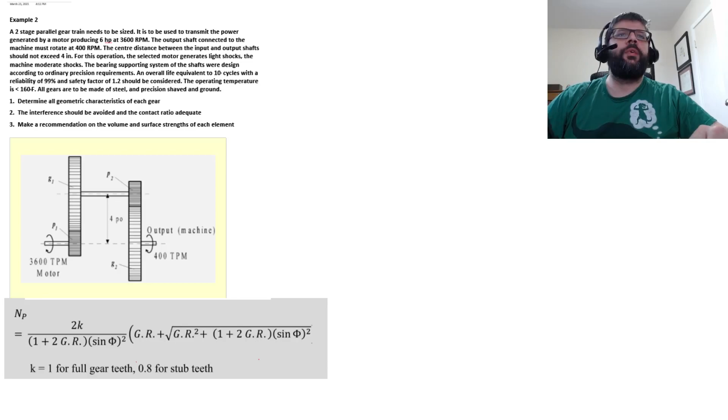Okay, so let's have a look at this problem here. It's the one we started earlier, where we'd solved based upon the combination of this rotational input, this rotational output, and the 4-inch offset, that we need the diameter of the pinions to be 2 inches, and we need the diameter of the gears to be 6 inches. And obviously that goes for both sides as well.

In addition, we want this thing to be transmitting 6 horsepower. The input is going to be equivalent to a light shock condition. The machine it's connected to is a moderate shock. We've got bearings of ordinary precision requirements.

Overall life expectancy of 10 to the 7 cycles, and a reliability of 99%. And then we want to have a safety factor of 1.2. So that'll be for both the surface fatigue and the bending fatigue, or the volume strength. Operating temperature less than 160 degrees Fahrenheit. So again, it's not hot enough that that's going to affect things. And we're making them out of steel, precision shaved and ground.

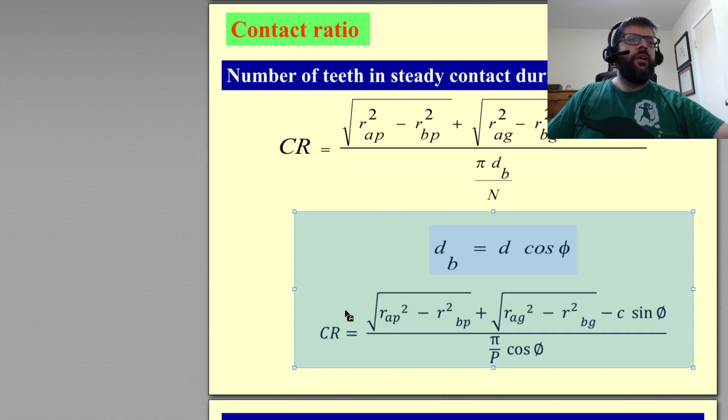What we want is, we need to pick a pitch, basically. So again, pitch is equal to the number of teeth divided by the diameter. So we need to have at least 15 teeth, which means that the pitch needs to be at least 15 divided by the diameter. So the diameter is 2, so 15 divided by 2, 7.5.

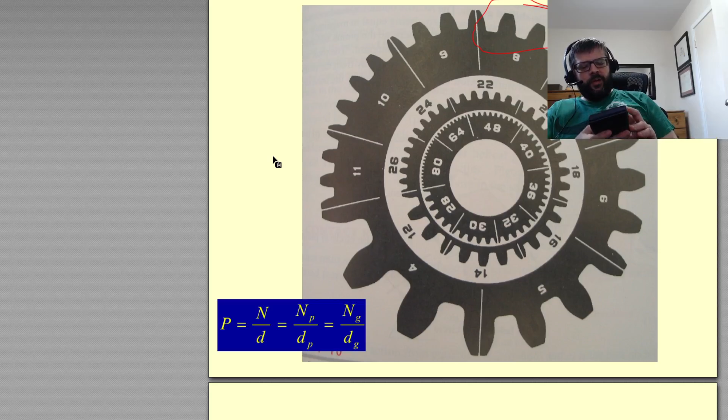So again, if we go back up to this chart right here, we see that 8 is reasonable, we can likely find 8. 8 or 10 would probably be suitable. We'll stick with the 8 value for now, so that our pitch, P, is equal to 8 per inch.

So if P is 8 per inch, the other aspect of the geometry of the gear that we need to find out is the width of the gear. So the face width of the gear typically varies from 9 over P to 14 over P. So we can pick something in the middle, or something on the high end if we want. What you actually decide will also depend upon what sort of gears you can get from your supplier. You probably don't want to be having these custom made. So if you can get something suitable in house, like off the shelf, then that'd be great.

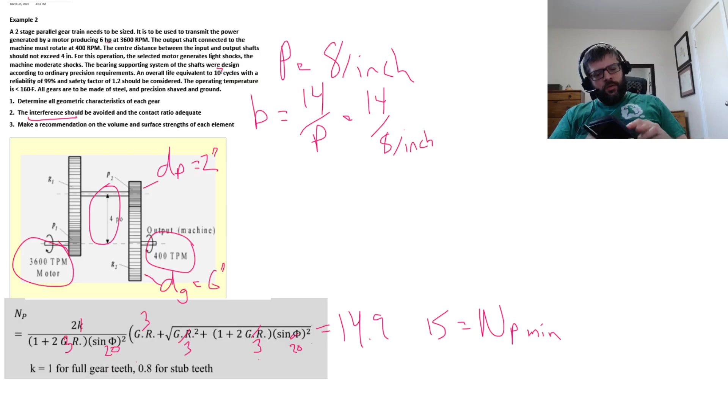But for the time being, let's assume we're going to go fairly wide, just to share the load a bit better. So let's go with a B of 14 over P. So 14 over 8 per inch. That'll give us 1.75 inches. All right, so our B is 1.75 inches.

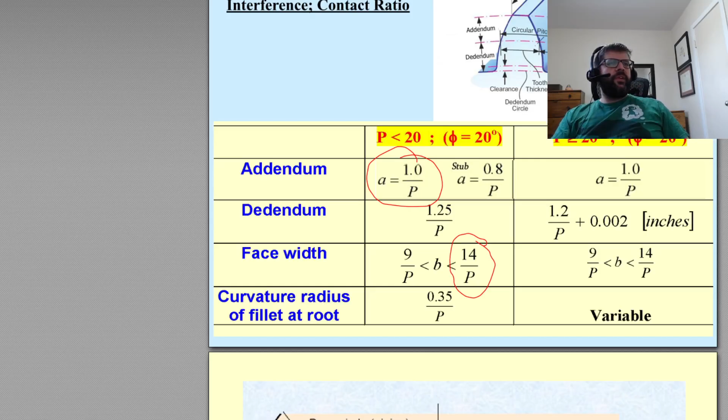125. There we go. So that's the size of our addendum, which we're going to have to use when we look at our contact ratio. So we're looking at our contact ratio. I'm just going to scroll down and have a look at what our formula is for that. So we're going to be using this to calculate that, which I'm just going to cut and paste into here.

So the values that we're working with, we need the radius of the addendum for the pinion and the gear, and the radius of the base circle for the pinion and the gear. So the radius of the addendum for either of them is just the radius of the pitch circle plus the addendum. So the addendum is the same size for both, and then the radius of the pitch circle is 1 inch for the pinion and 3 inches for the gear. So our RAP is going to be 1.125 inches. Our RAG is going to be equal to 3.125 inches.

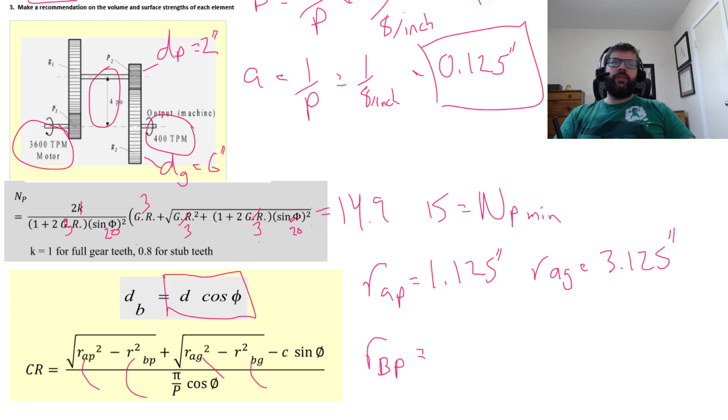Our radius of the base circle for the pinion is going to be just based upon half of this value here, half of the diameter times the cos of the pressure angle. So 1 inch times cos of the pressure angle, that gives us 0.9397 inches. And then since this value here varies directly with the diameter, we know that the radius of the base circle for the gear just needs to be 3 times that. So 2.819 inches.

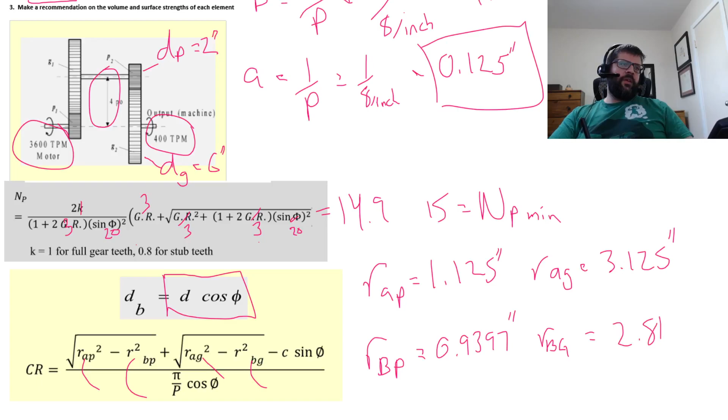So other values here, we've got this C, that's just based upon the offset between the two shafts. So the center line to center line offset was 4 inches. Obviously the pressure angles are all 20 degrees. So let's start plugging in numbers here. So we've got this term here, 1.125 squared minus 0.9397 squared. Take the square root of that. That term there is 0.619 inches.

This term here next to it, we've got 3.125 squared minus 2.819 squared, and then take the square root of that. That gives us 1.349 inches. And then 4 times the sine of 20 degrees gives us 1.368 inches.

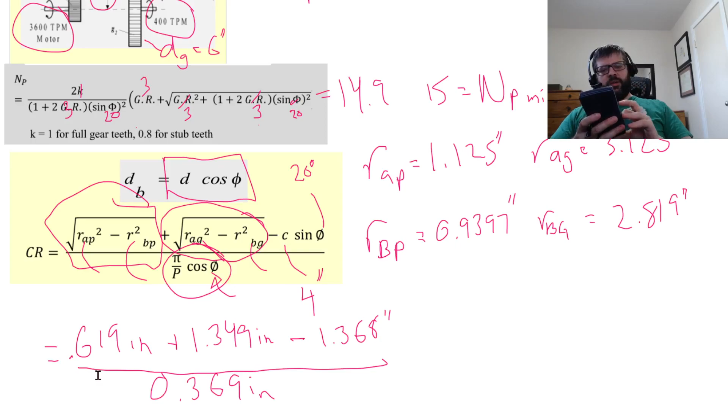Then this term here at the bottom, pi divided by 8 per inch times cosine of 20. That gives us 0.369 inches. So add the stuff on the top together. I'll subtract the last term because it's negative. That's 0.6 divided by 0.369. That gives us a contact ratio of 1.62. Sorry, rounds to 1.63. So that is perfectly adequate.

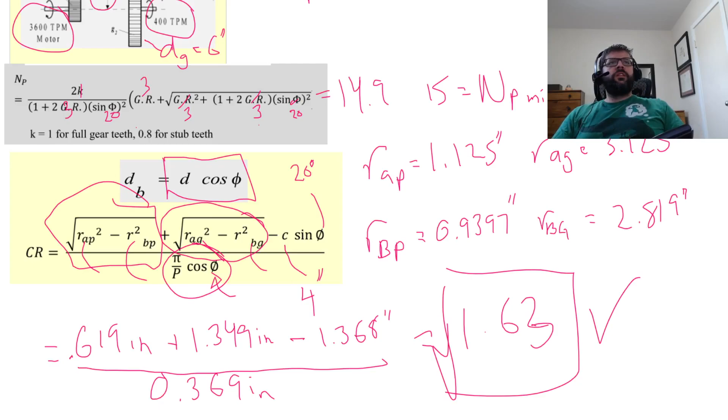Okay, so next up, we got 1 done, we got 2 done, we got 3 done. Recommendation on the volume and surface strengths of each element. So first off, let's figure out what the stresses are. So if we recall, our stress levels are going to be based upon this formula right here.

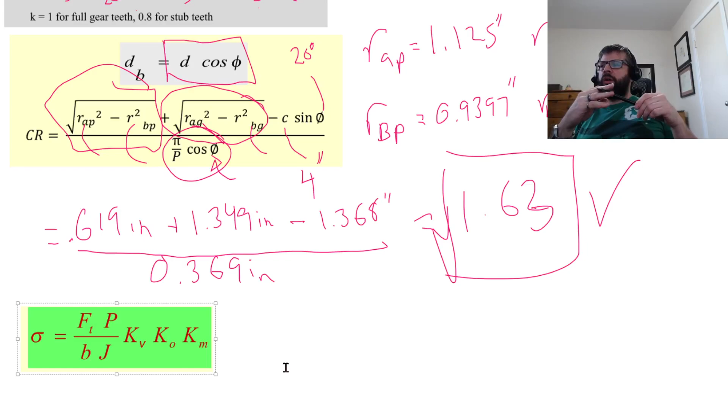So first off, what is our FT? The transverse portion of the force, or the force causing the torque. I'm not sure if that T is for torque or transverse. Whatever, I'm not too picky about what it actually means, as long as you know what it is.

So we can figure that out based upon the fact that we know what the power is. So the transmitted power, again, W is the work rate. Transmitted power is equal to that Ft times the velocity divided by 33,000. So if Ft is in pounds, and V is in feet per minute, and again we calculate the V with pi times the diameter in feet times the RPM.

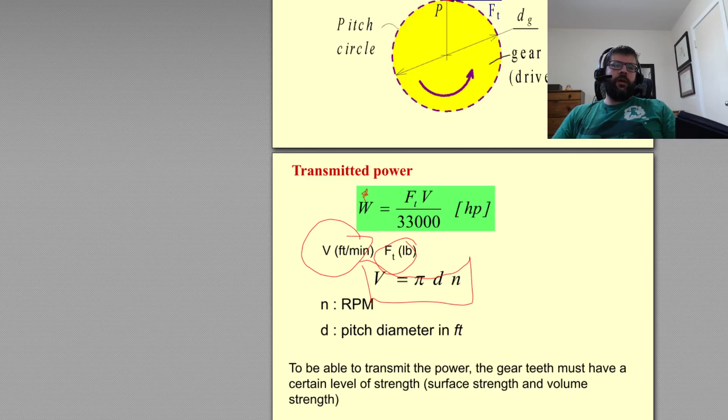So let's get that V1 going first. So again we're worried about what's going on in the pinion. I'd also like to specify that we're worried about what's going on in this pinion right here. So that's going to be the weak factor, not this one, because this is the one that sees the higher torque. The one on the right sees the higher torque. This one here is the higher speed. So the higher torque results in higher stresses. Higher stresses leads to fatigue failure. So what we want to do is figure out what our V is based upon the rotational speed of 400 RPM.

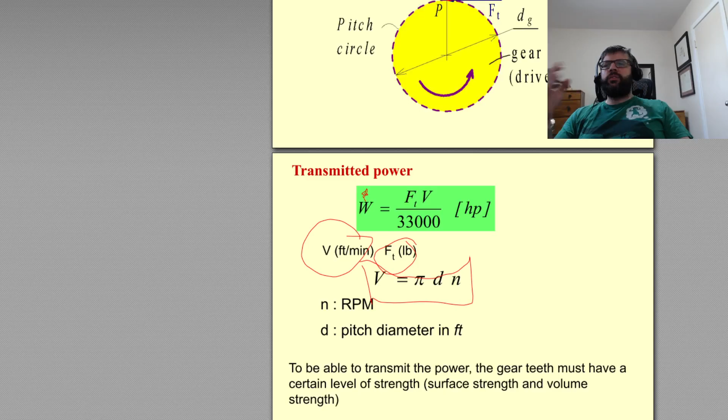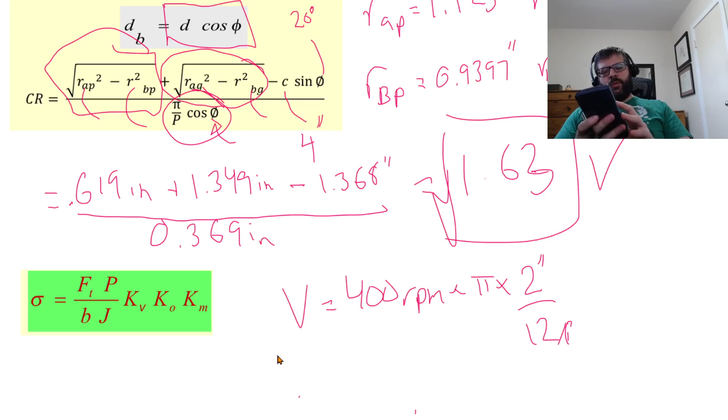So our V is going to be equal to 400 RPM times pi times our pitch diameter in feet. So that is going to be 2 inches divided by 12 inch per foot. So inches cancel out, we get feet on the top. So 400 times pi times 2 divided by 12. So that there is 209 feet per minute, is our velocity there. Actually, that's a bit off the screen here. I'll rewrite that.

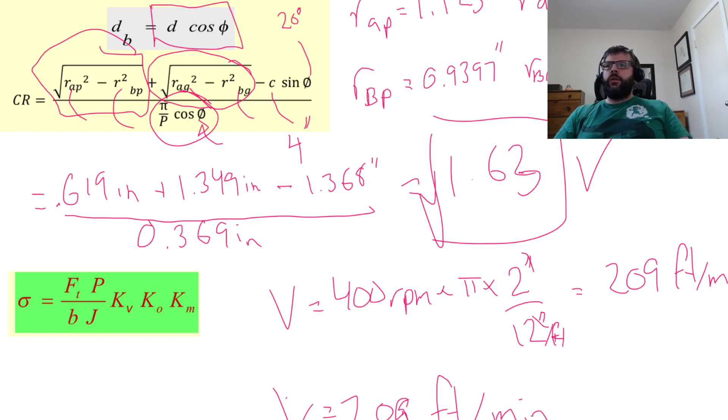Okay, so that's our velocity. And then the power rate is equal to the force times the velocity divided by 33,000 feet pounds per minute. So yeah, 33,000 feet pounds per minute, or 550 pound feet per second is what a horsepower is.

So 33,000 feet pounds per minute per horsepower. That's that conversion factor right there. So if we want to know what our FT is, we basically just need to multiply out this conversion factor and plug in our values for the work being done. So we have 6 horsepower times 33,000. Oh, here, I'll scroll up a little bit. Times 33,000 feet pounds per minute

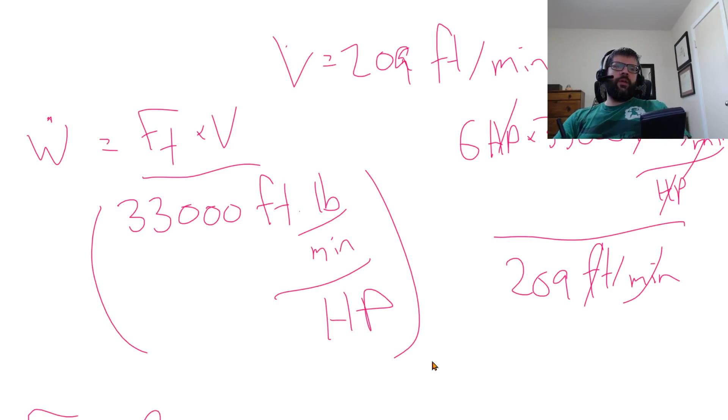per horsepower. Obviously, the horsepower cancels out, and then we need to divide by our V as well. So divide by the 209 feet per minute. So that cancels these out. And we are left with FT is equal to 6 times 33,000 divided by 209. That gives us an FT of 947 pounds. Pound force.

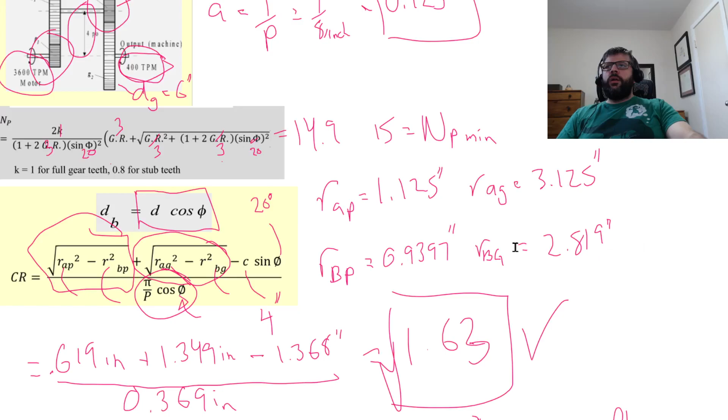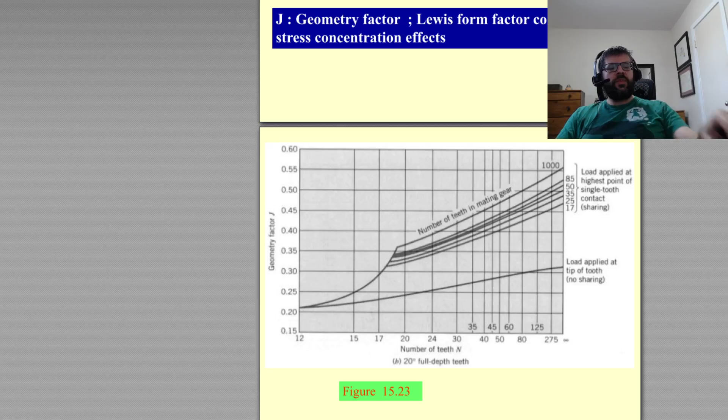Okay, so we got that. We got the force. We know what the pitch is. We know what the B is. So we need to know what this J is next. So that J there is the corrected geometry factor. So basically taking that Lewis form factor and correcting it for stress concentration effects. So that is a function of the number of teeth in the gear that we're looking at. Again, in this case, we're looking at the pinion, and it is a function of the number of teeth it's mating with. If the number of teeth gets high enough, it doesn't in this case.

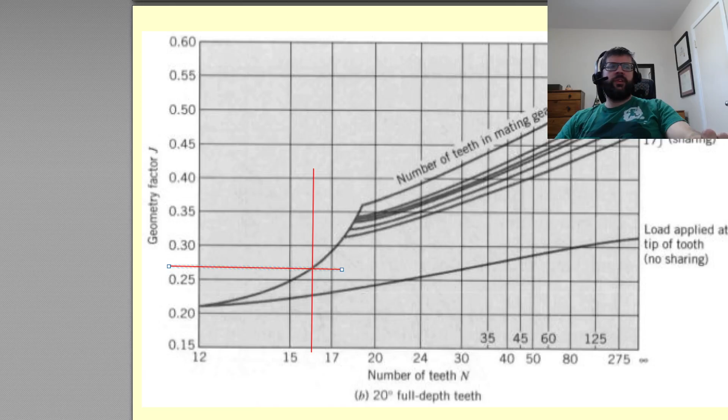So in this case, I like to draw a straight line for that. So we're at 16 as the number of teeth in our pinion, which means that our line intersects right about there. That to me looks to be about 0.27. 0.27 is our value for J. And then KV, KO, KM. So our KV, that's our dynamic factor. That's based upon the surface quality and the speed at the pitch diameter.

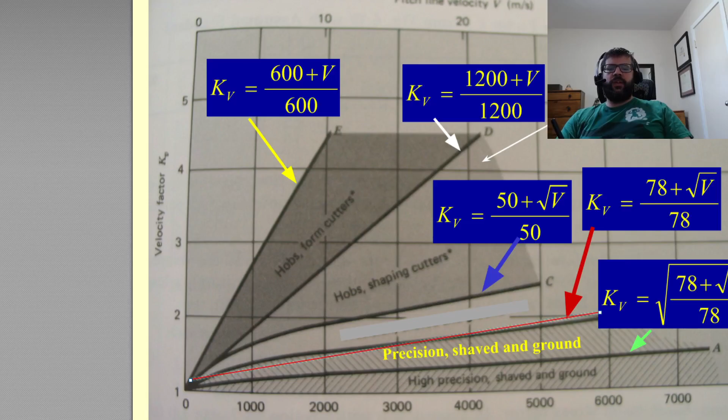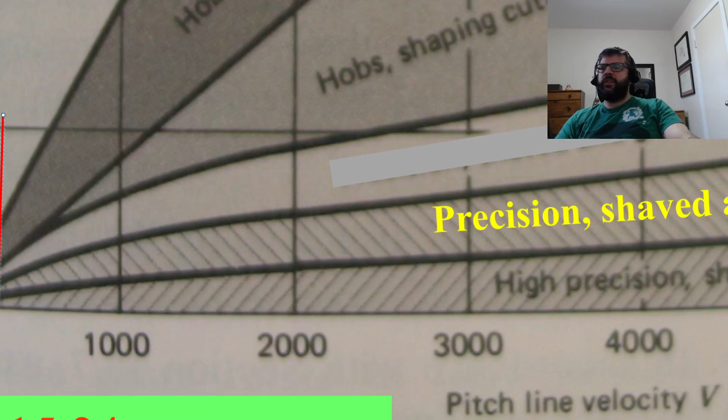So looking at this graph here, I had said that we are looking at a precision shaved and ground gear. So that's this line right here. And we're looking at a pitch line velocity that's 209. So that's fairly low. So I'm going to zoom in a bit here. So, sorry, 209. Did I say 2000? I forget. Yeah, so here's 500, 250, 200 should be right about there. 209 should be right about there. So our intersection right there. What do you think? 1.2? 1.15 maybe? Let's go 1.2. We'll err on the side of caution. So that's 1.2. Our KV.

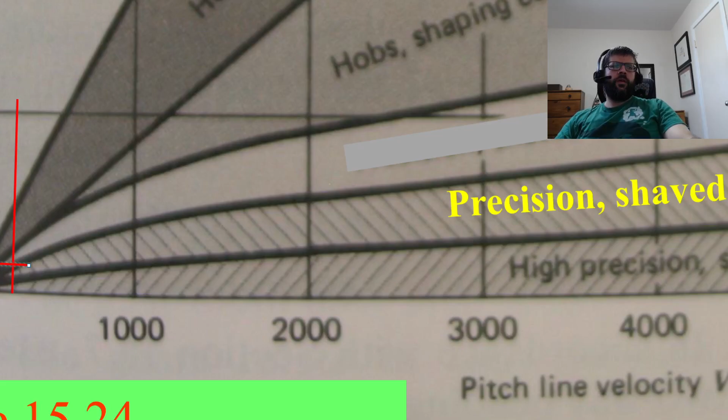Next thing we want is our KO. So overload factor. So the KO is a function of how much pulsing you get in the torque that is being applied to the gears based upon the shock in the power source and the shock in the machinery. So in this case, we had said it was a light shock power source and a moderate shock machine that's being driven. So we got a KO of 1.5. 1.5.

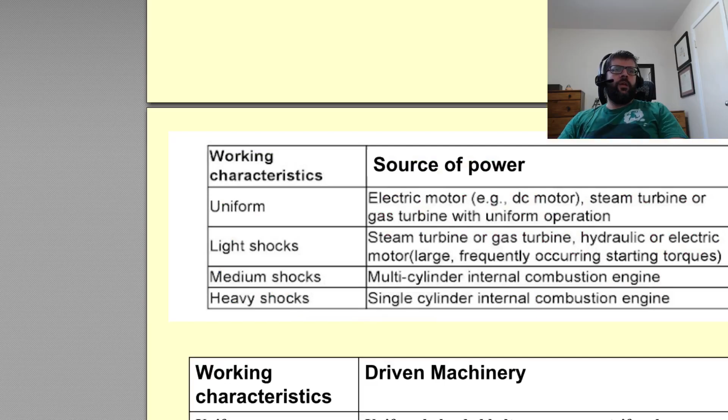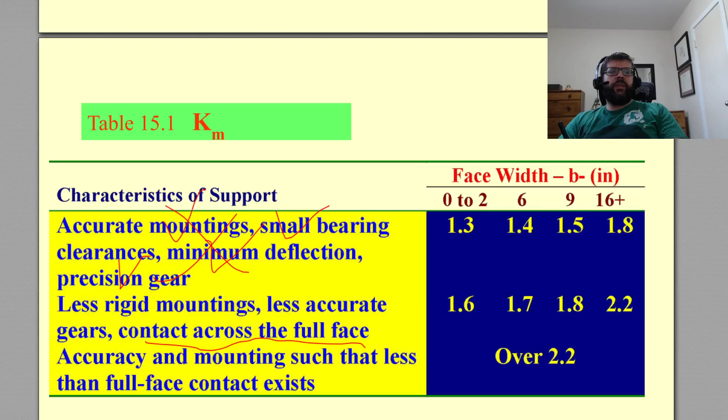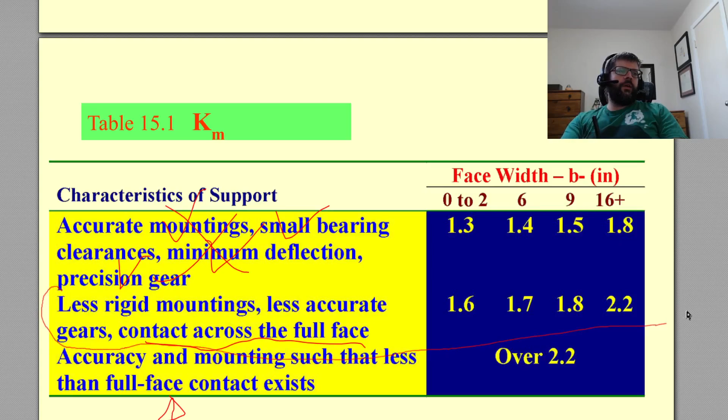And then our KM. So our KM there is a function of the load distribution. How accurately is this mounted? So it is said it was an ordinary mounting condition. So if we look at our graph here, I'm going to say that doesn't necessarily count as accurate mounting or small bearing clearances or minimum deflection. We're not necessarily getting that, but we're still getting full contact across the full face. So it's not bad enough that less than full face contact exists. Otherwise, they would have mentioned it. So we are looking at this row here. And the face width is 1.75 inches. So we're looking at this column here. So our KM is 1.6. 1.6.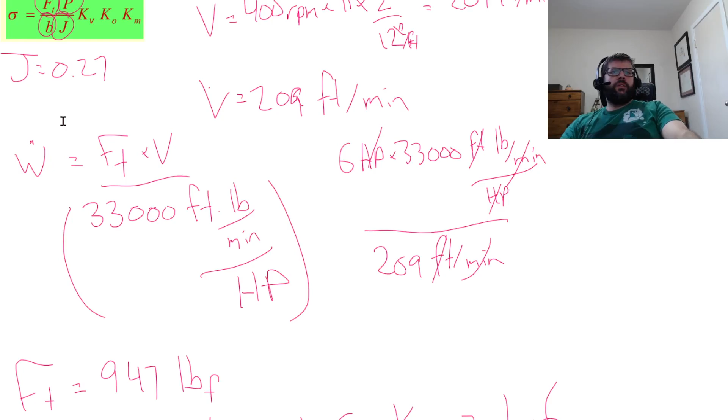So now we got that. Now we can solve for what our stress level is. So our stress is going to be equal to our FT, 947 pounds force, times the P, so 8 per inch, divided by our face width, 1.75 inches, times our geometry form factor, the J of 0.27, and then times our KV, KO, and KM, times 1.2 times 1.5 times 1.6.

That is a terrible looking 6. Let's see here. There we go. So what does that give us? 947 times 8 times 1.2 times 1.5 times 1.6 divided by 1.75 and 0.27. It gives us syntax error. Yeah, let's try that again.

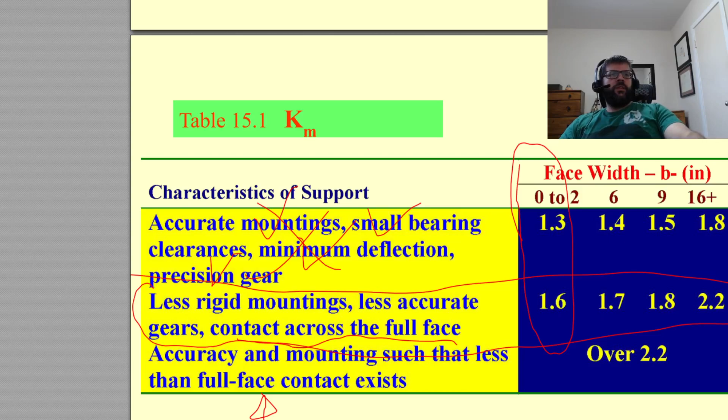Alright, so our stress level here is going to be equal to 46 KSI. So that's the stress that we're looking at. Obviously, we need to compare that to some sort of strength. So we use this nice formula right here to determine our strength.

So I'm just going to go ahead and screenshot that. The stuff we don't know here is our SN, because we're trying to find out what sort of materials we need. We know it's some sort of steel, but we don't know what heat treatments we need to do to it, or what alloy we need to use, or what have you. So that is unknown. Our CL is equal to 1, because CL always equals 1 in this case.

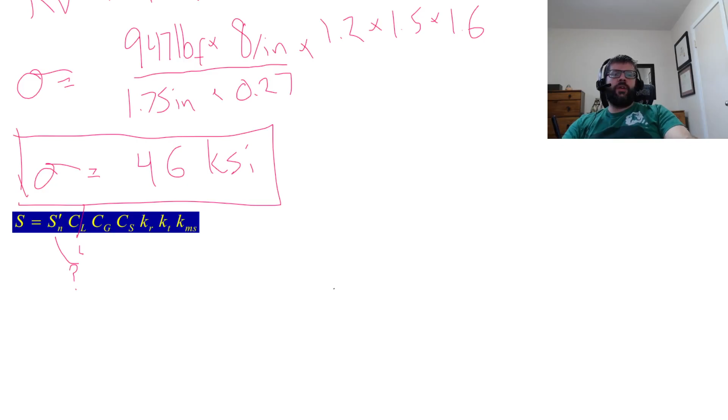Our CG in this case is equal to 1, because the gradient factor is equal to 1 if you have a P, your pitch, that is greater than 5 per inch. So we are at 8. So we're good to go there. So that's also equal to 1.

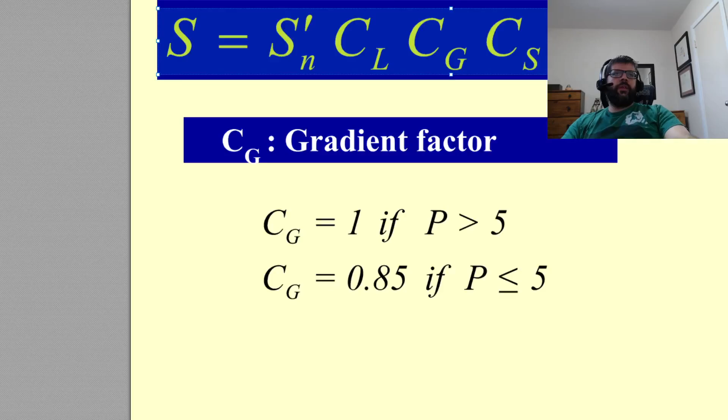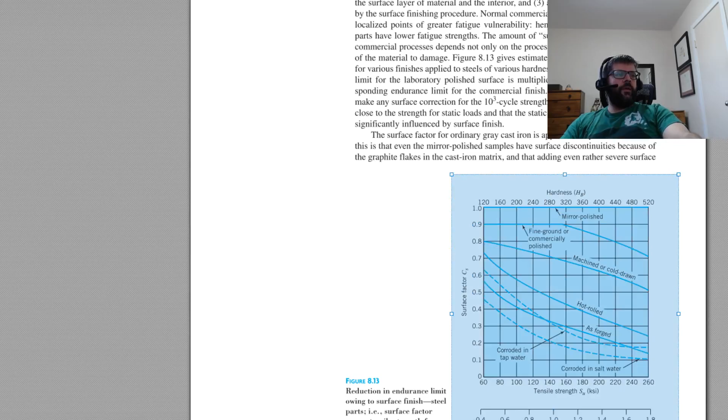Our CS, we need to go to the charts for that. So for that, we're going to go to our handy dandy Juvinall, chapter 8. And let's see here. We're just going to pretend I didn't draw over that previously. There we go. Let's just screenshot that. Stick it in here.

So, we are assuming here that we are working with a fine ground or commercially polished situation at the root tip. We're not talking mirror polished. No one's mirror polishing the inside of gear teeth, but fine ground and commercially polished is completely reasonable. And we did specify at the beginning that it's precision shaved and ground, is how it's worded up at the top there.

So basically, we know that we need to make a guess about what sort of hardness we might need for this, because we're using this value to calculate the hardness, but it's a function of the hardness. Or the tensile strength. Essentially, for gears, you're often talking about Brinell hardness numbers instead of necessarily the ultimate strengths, because you can measure that on a gear. You can do a Brinell hardness test on the gear. You can't necessarily do a tensile test with the gear.

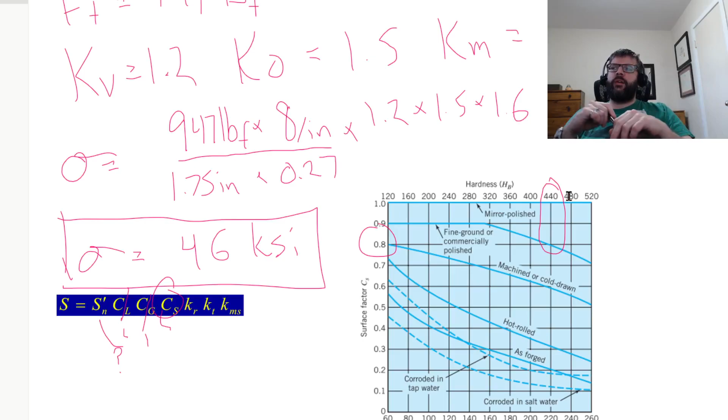If we end up calculating a required Brinell hardness number that's smaller than that, then we underestimated our CS, which means that we made too conservative an assumption, which, okay, so be it. Unless that would substantially ramp up the costs, then you might just accept it, or you might spend the 10 minutes it might take to redo your calculations based upon a new iteration. But anyways, for now, let's use the CS of 0.8.

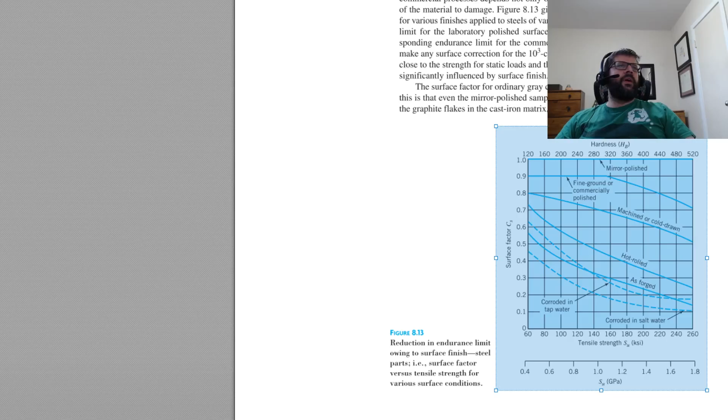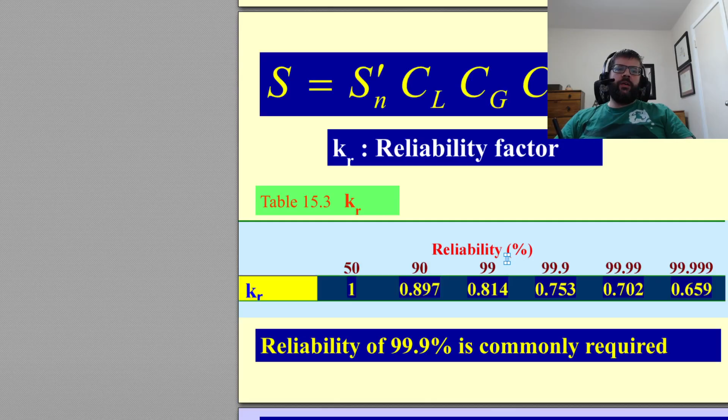And then we got our KR here. Again, I don't know why when they switched to gears, they decided to start using KR instead of CR. They used the KR in the strength for bending. And then yeah, I don't know why. So we were talking 99%. So we're looking at a KR of 0.814.

CT, the temperature effect. The temperature, we were told, would stay below 160 degrees Fahrenheit, so that's going to be equal to 1. And then the MS, the mean strength effect. So again, that's based upon whether or not we have this thing going up and down in stress, or whether we have this thing just going up. So in this instance, because this is not an idler gear, all these gears involved are only going to be seeing force applied to one side of the gear. So we're working with a KMS of 1.4.

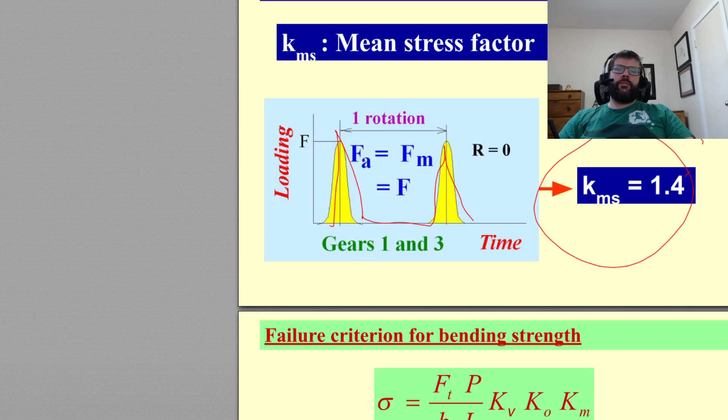So then we can figure out what our strength is in terms of Sn prime. Sn prime times 0.8 times 0.814 times 1.4.

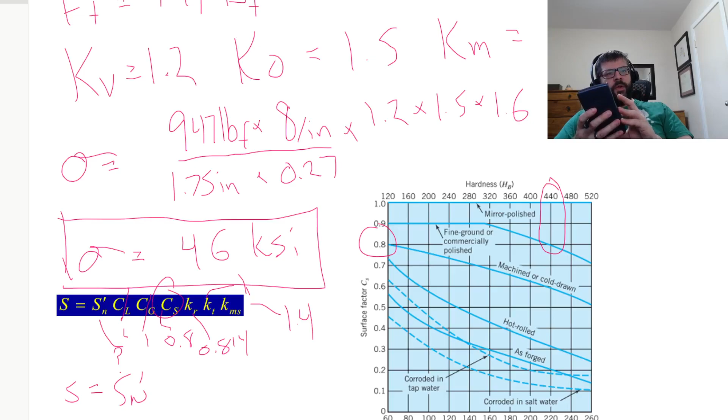So that gives us an S that is equal to 0.91 Sn prime. So again, like I said, we want to kind of get this in terms of your Brinell's hardness number. So again, Sn prime is typically equal to 0.5 of SU, and then SU is typically equal to 0.5 of the Brinell's hardness number when measured in KSI.

So our S value here is going to be equal to 0.91 times 0.25 times the Brinell's hardness number. So that's going to be our strength that we would need.

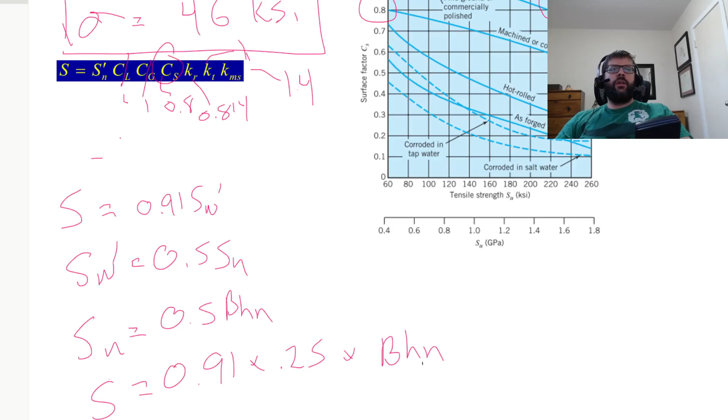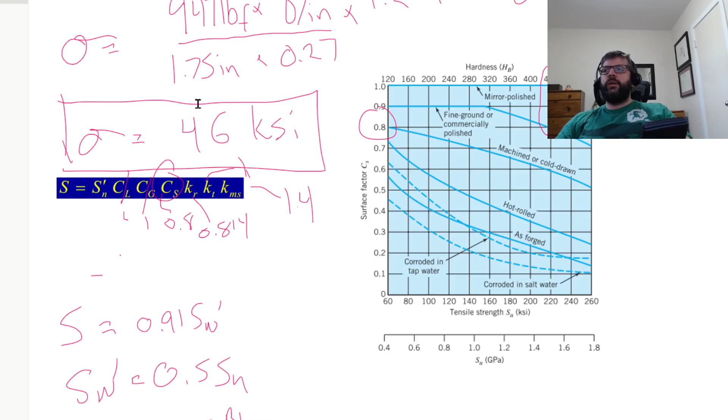And again, what is that? 0.91 times 0.25 is 0.2275 BHN. So that strength divided by our safety factor of 1.2 needs to be greater than or equal to the stress level that we're seeing of the 46 KSI.

So if we just solve for the Brinell's hardness number, 46 times 1.2 divided by 0.2275, that means that we need to have a Brinell's hardness number that is greater than or equal to 243 when we round it, which is reasonably obtainable for most steels.

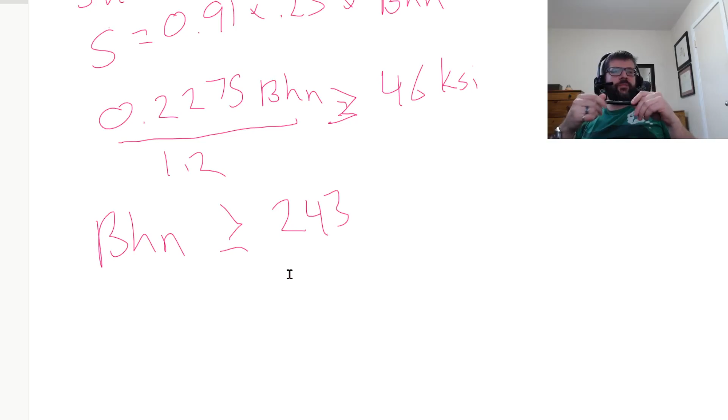So that'll be in terms of the fatigue crack growth damage. We're also worried about the surface fatigue. So this is damage, this is cracks growing like this that then cause your gear tooth to break off completely. We're also worried about basically erosion that's going on kind of on the face that comes into contact with the other gear.

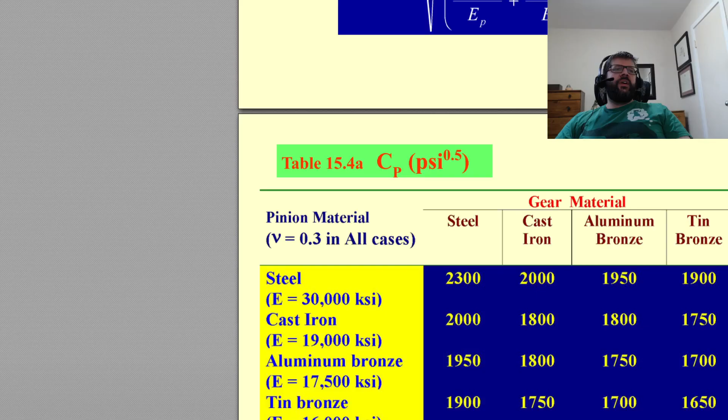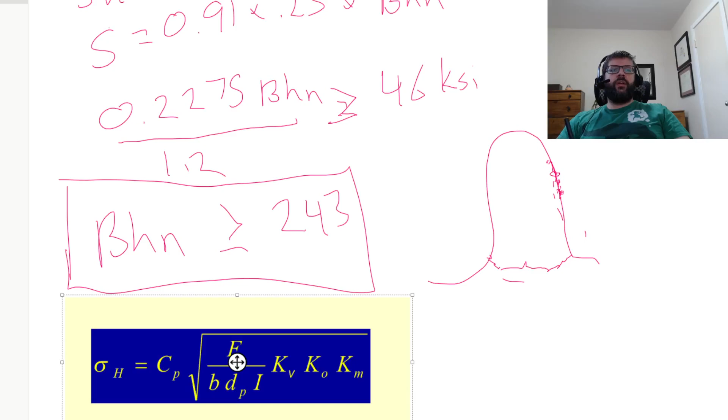So what do we do for that? We got this nice formula right here. So I'm going to copy and paste that. So some of the stuff we know already. The FT, that was FT was 947 pounds. KV, KO, KM. That's these right here.

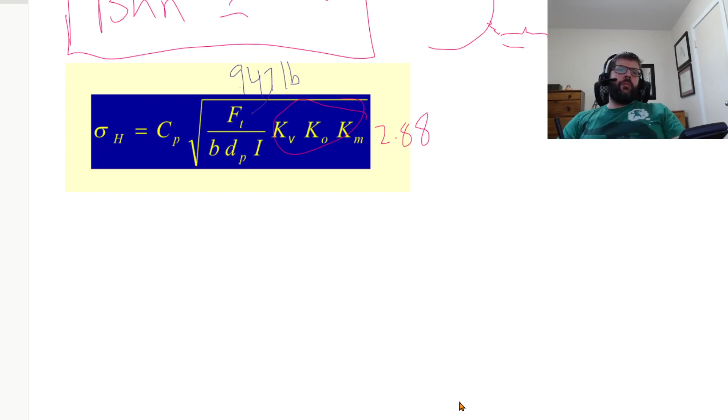So 1.2 times 1.5 times 1.6. All those together is 2.88. Our B here, 1.75 inches. Our diameter of the pinion here, 2 inches. So we need to know what our CP is, and we need to know what our I is.

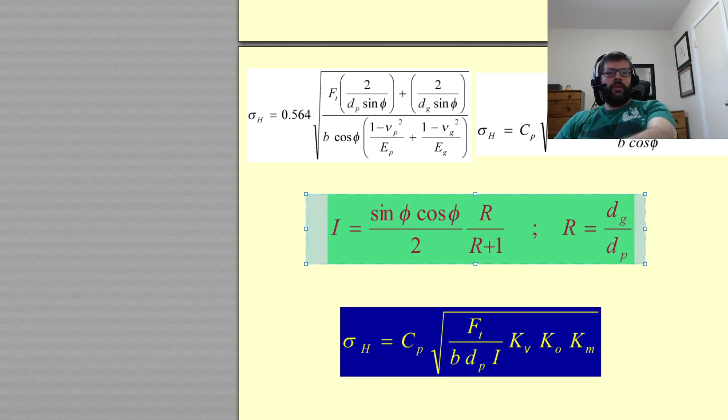So I, that's given here, and that's in terms of the radius of the gear ratio. So the diameter of the gear divided by the diameter of the pinion, or the number of teeth in the gear divided by the number of teeth in the pinion. That R is 3 in this case. So this term here is 3 over 4. These two terms here combined, 3 over 8, times the sine of 20 degrees times the cosine of 20 degrees. So sine 20 times cos 20 times 3 over 8. That gives us an I is equal to 0.121.

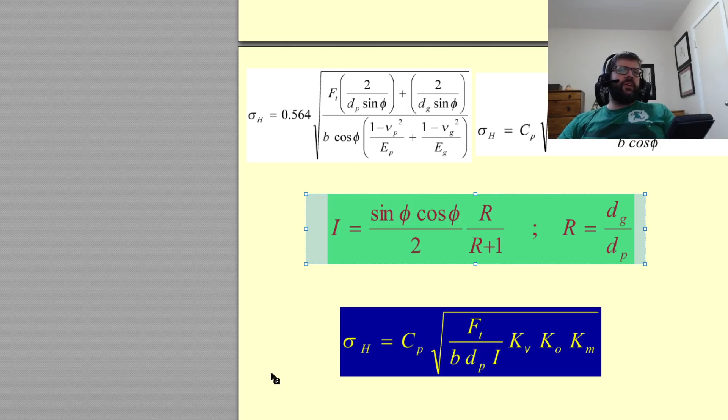So that's our I. The CP term here is a function of the materials in the pinion and the gear. So in this case, both pinion and gear are made of steel. Not that one, because that's the metric table. So the value that we're looking for is the 2300 root psi.

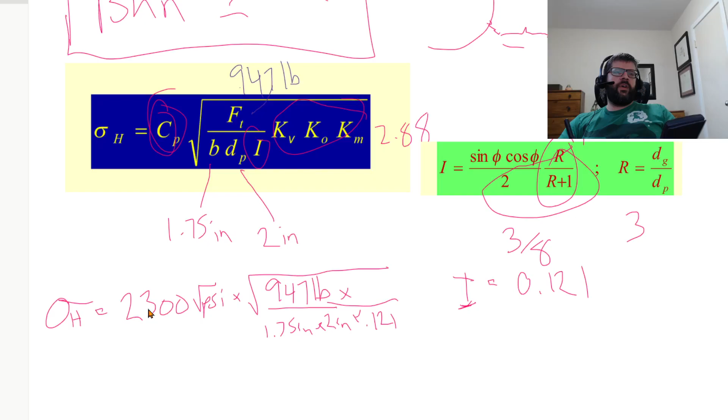So let's throw everything together here. 2300 root psi times square root of 947 pounds divided by 1.75 inches times 2 inches times 0.121, and then this term here, all these three terms here combined to 2.88. So 947 times 2.88 divided by 1.75 times 2 times 0.121. So everything there, and then take the square root.

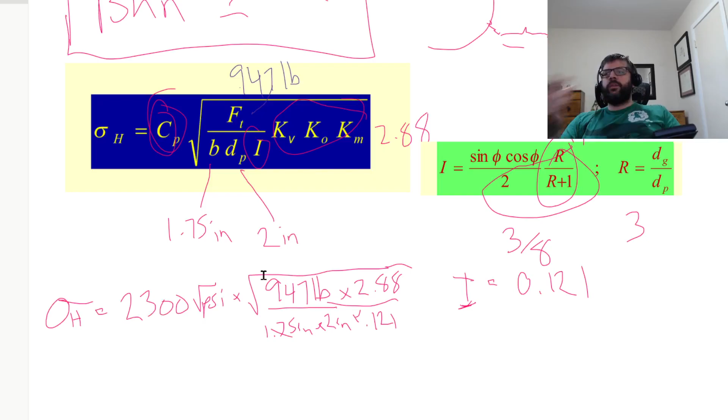It ends up being 80.2 root pounds per square inch, and then square root. So when we multiply that out by the square root on the outside here, the result that we get in the end is in psi. So 80.2 times the 2300. This gives us a contact stress of 184 KSI. 184,000 pounds per square inch.

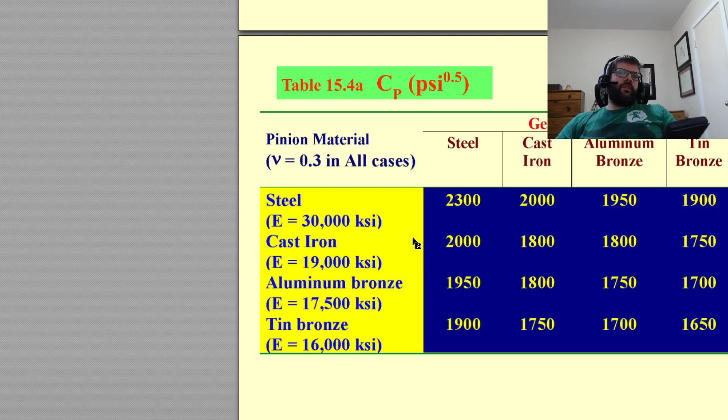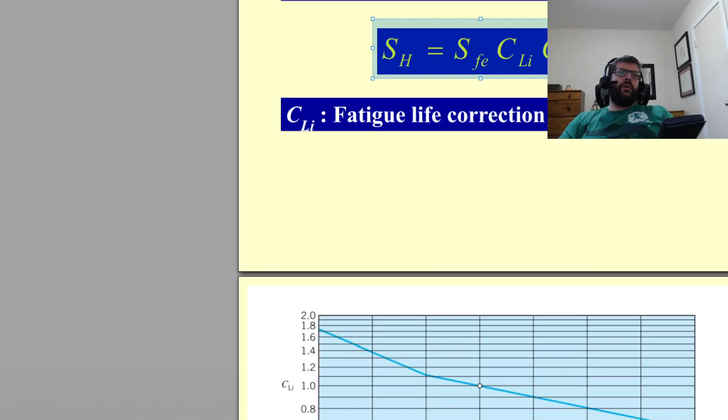Okay, so obviously we need to compare that stress level to some sort of strength. So the strength value we're using is this here. So we need our SFE, we need our CLI, and we need our CR. So our fatigue life correction factor, based upon a desired number of fatigue cycles of 10 to the 7, which is what the problem asks for, is 1. So our CLI is 1.

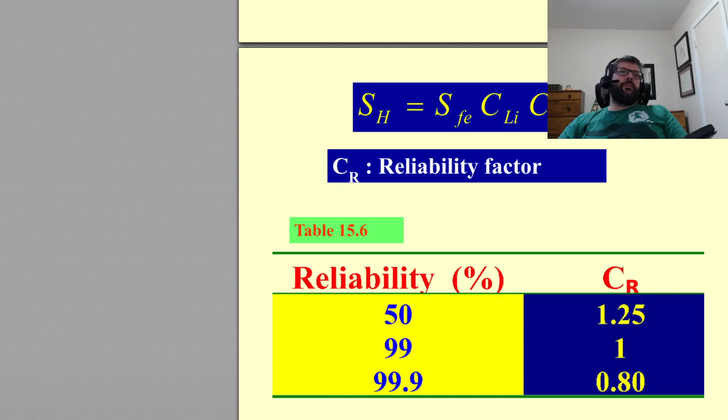The reliability factor used for surface fatigue damage at 99% reliability, which is what we asked for, is 1. So 1, 1, therefore our SH is equal to SFE. What does SFE equal to? So that depends upon the material. That's a material property. And for steel, it's a function here of our Brinell's hardness number. So 0.4 times the Brinell's hardness number minus 10. And that'll be in KSI.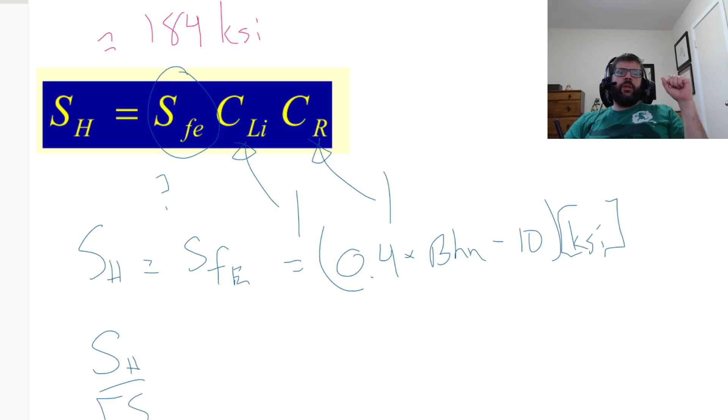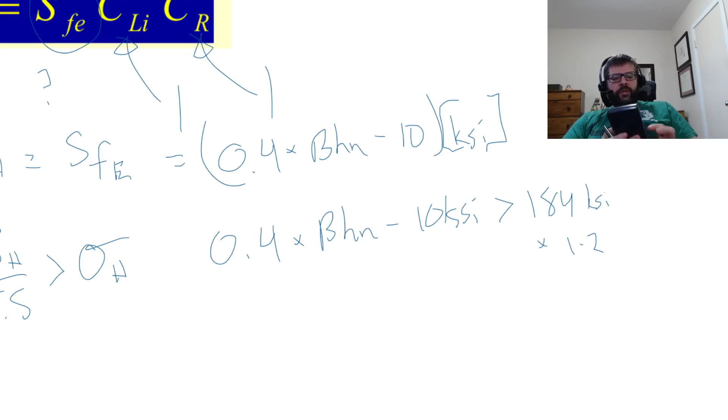So, as per usual, we need to involve the safety factor as well. So again, our strength level divided by our factor of safety needs to be larger than our stress level. So if we want to ensure that this thing is safe, we need a Brinell's hardness number such that 0.4 times the Brinell's hardness number minus 10 KSI is greater than 184 KSI times the safety factor of 1.2. So 184 times 1.2, that gives us 220.8 plus the 10 KSI to move over from the other side, divide by 0.4. That gives us a required Brinell's hardness number on the surface of the material that needs to be greater than 577.

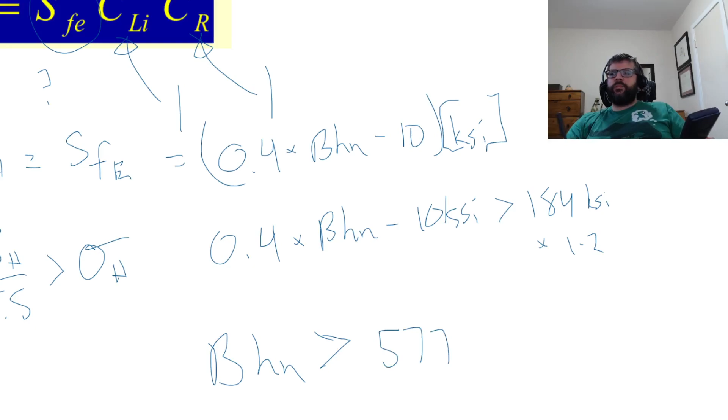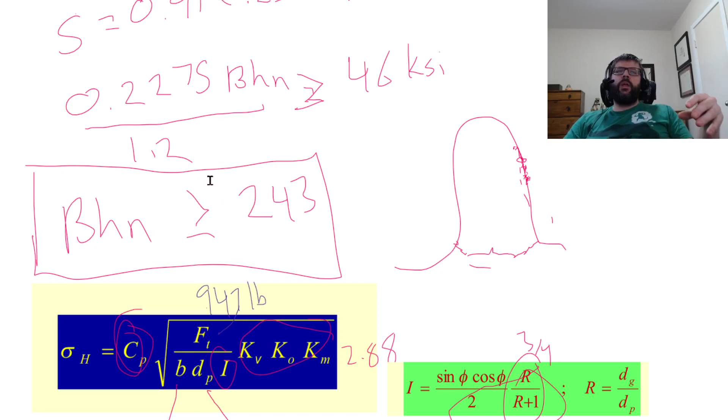So again, that is certainly not as easily attainable as the Brinell's hardness number of 243 that we required in order to have a safe operation in terms of the crack growth at the root. But this needs to be obtained through heat treatment of the entire gear, whereas the Brinell's hardness number for the surface fatigue is based upon just the strength at the surface. So if we want to do that, we can use some sort of treatment that only targets the surface. It doesn't necessarily need to penetrate deep. So if we use something like case hardening or what have you, then we would be able to use that. So those are basically the two material requirements that we would need to have for the Brinell's hardness number of the pinion.

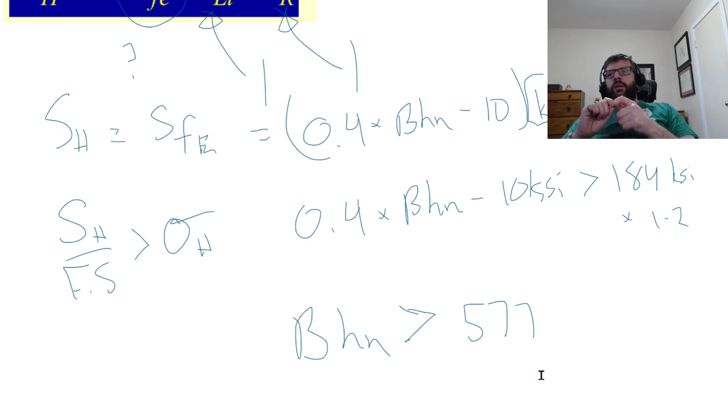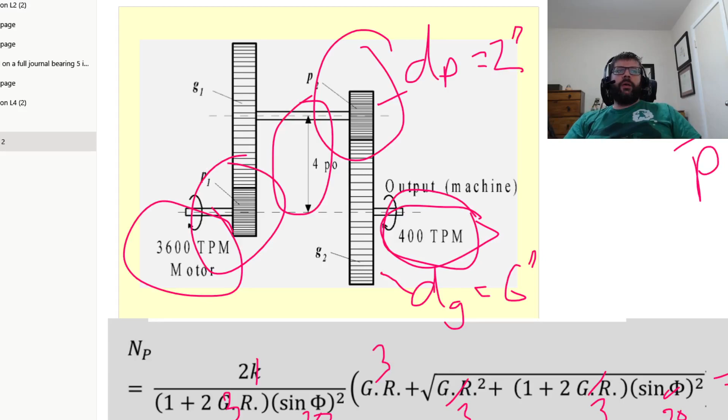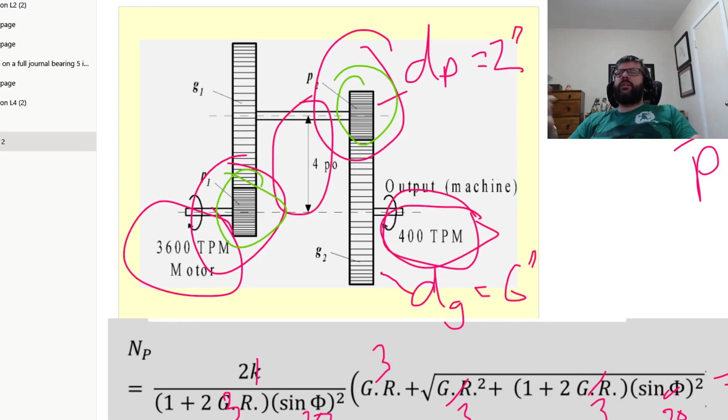And that's again for the limiting factor here, that is based upon, let me zoom over here. That's based upon this pinion here, again to reiterate, because the stresses it sees are higher, as opposed to this pinion here, where it's seeing more rotations, certainly, but the stresses aren't nearly as high. So as a result, and again, we're designing for 10 to the 7 cycles. So if we drop the stresses by 3 because the torque's 1/3, we expect the fact that this thing's seeing 3 times as many rotations is not nearly overcompensated by the fact that its stress level is so much higher. So we're worried about that one here.

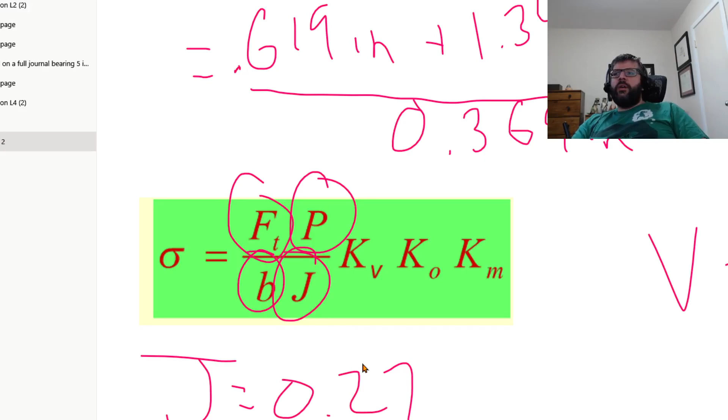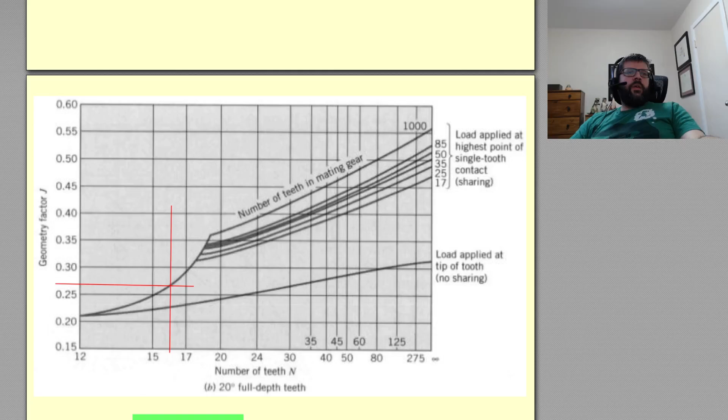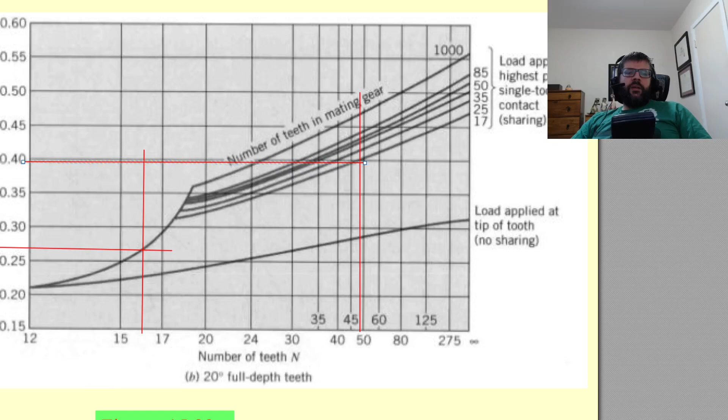And then obviously similar for the gear. It's less critical for the gear, but at the very least the gear itself will be seeing stress levels that are at least on the same order. It's going to be slightly less because primarily when we look at the J factor for the gear, when we're looking at the bending stress levels, the force is the same, the pitch is the same, the width is the same, all this stuff is the same except for the J, because the J, you'll recall, is a function of the number of gear teeth. So for the pinion, we were over here at 16. So 16 times 3, 48. So here we'll be looking at a line right about there. So that would be a J factor of 0.39, I guess. So essentially, we can expect the bending stress that we would see to be reduced by a factor of 1.4.

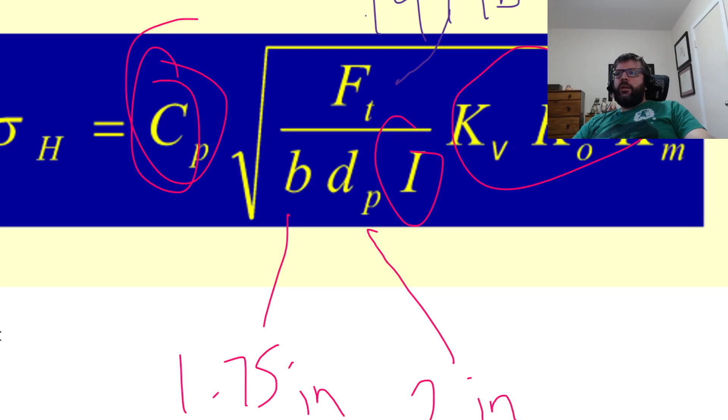If we look at the stresses involved for the surface contact, it is going to be seeing the same stress levels because nothing here changes when you switch from the gear to the pinion at all. Contact stress is going to be the same for both as long as they're the same material. And then obviously the main difference here would be that the gear doesn't need to rotate as much. So for every 1 rotation that the gear makes, the pinion's making 3. So its CL here isn't for a number of cycles of 10 to the 7, it's designing for 3.3 times 10 to the 6.

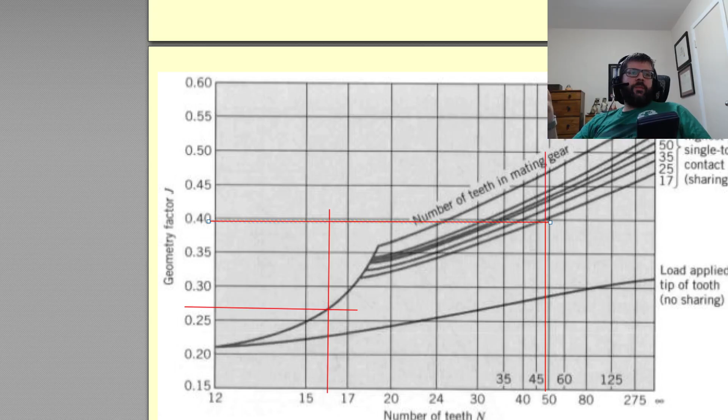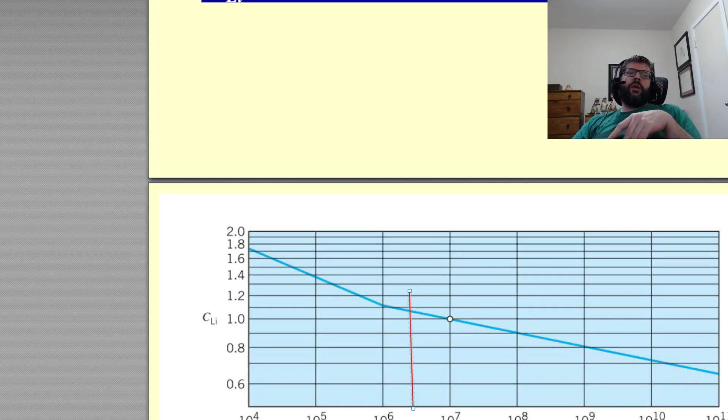So, right about, well, probably hard to. I'm not very good at figuring this out since we're relying upon a log graph, but I think that might be about here-ish. So, yeah, 1.05. So the apparent strength of your material would be a bit larger because it doesn't need to see as many rotations. But yeah, that's about that.